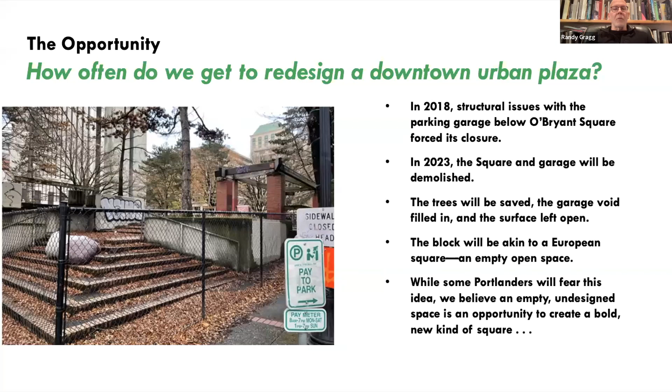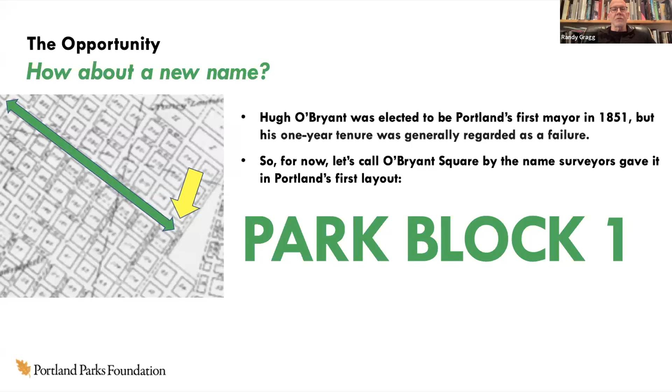So first off, I think we can think about this square as something different from the get-go. Hugh O'Bryant, I'm sure he tried hard. He was our first mayor. He had a one-year term that ushered in the first charter reform movement. He did give some books that formed the early collection of the Multnomah County Library, so that's important. But for the most part, he was not an incredibly important person in Portland's history. In the earliest maps, the block was called Park Block 1. It was part of a series of parks. So we'll start calling it that in an effort to clear the slate.

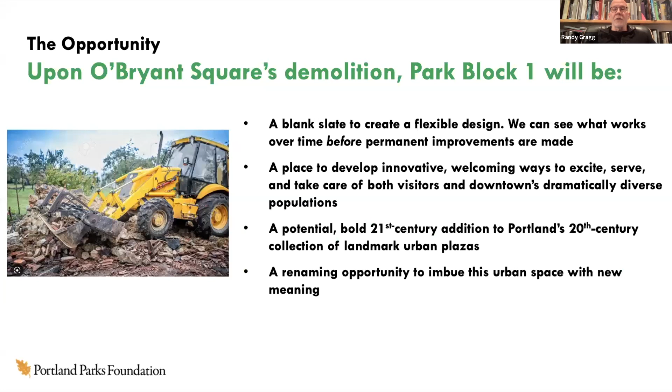So what we have here is an opportunity, a blank slate to create a flexible design that we can try out before permanent improvements are made. It's a place to develop innovative and welcoming ways to take care of both visitors and downtown's existing populations. We think it's an opportunity to really think boldly, and as I mentioned, a renaming opportunity.

So back to these fundamental questions: who's the you? We're going to be reaching out to all kinds of groups: social services, residents, urban advocates, arts groups, adjacent property owners, businesses, food vendors and retailers, and also an important constituency: downtown youth.

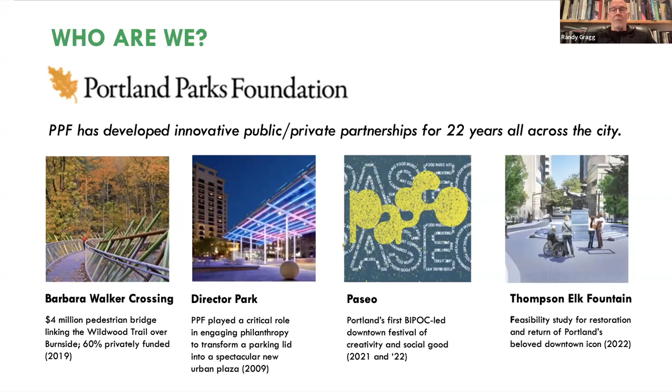Who are we? The Portland Parks Foundation, for those not familiar with us, we've been around for about 22 years. We've done projects all over the city. Our motto is we help people help parks. We really try to wed private sector initiative and money to public improvements of parks. Our biggest project was the Barbara Walker Crossing, which links the Wildwood Trail over Burnside, over what was a really dangerous crossing. We finished that about 3 years ago. We were involved in Director Park. We have an annual festival called Paseo, where we bring communities of color together to organize their own festival downtown. And we're currently working on the restoration and hopefully return of the Thompson Elk statue. That's just a few of our activities.

The Loeb Fellowship is a fellowship program that I was very lucky to be part of. It's a 50-year-old program. About 400 Loeb Fellows at one time or another have gone through Harvard, mid-career professionals looking to backfill and expand their horizons. We're bringing a great group of folks with different expertise in areas around public space, ranging from real estate to trauma-informed design, to mobile architecture, to youth, and to public outreach methodologies.

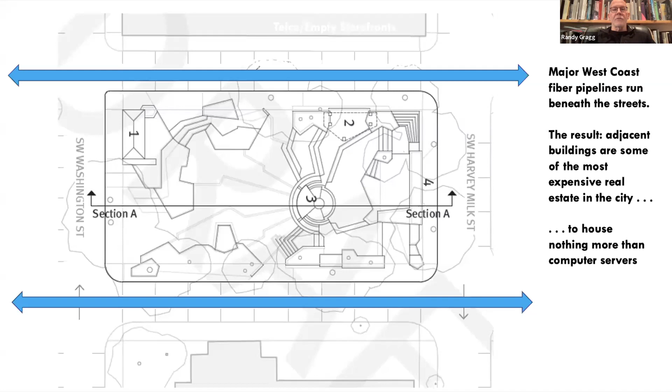These two blue lines mark basically the I-5 of fiber brackets around O'Bryant Square, and that's led to some interesting things. We have both some blank wall buildings around it, which don't really front it with good uses like retail, but we also have entire buildings devoted to telco equipment. The Pittock block, on top of this slide, is actually a critical infrastructure facility — the entire state's 911 system is run through the servers in there. So while this is all very important to how we operate day to day, it doesn't make for very good neighbors for a park.

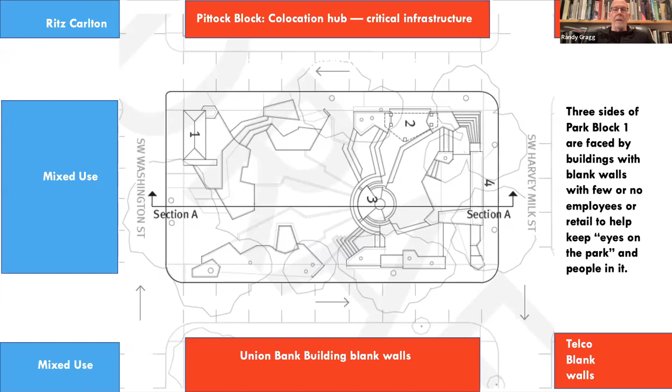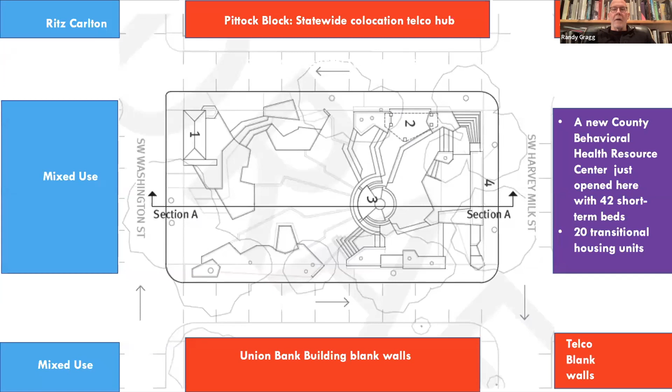It doesn't bring the office workers and retail uses that really make for a lively urban plaza. And then Multnomah County remodeled an old building to the north into a trauma-informed mental health and behavioral health facility, and that's created another interesting neighbor for the plaza.

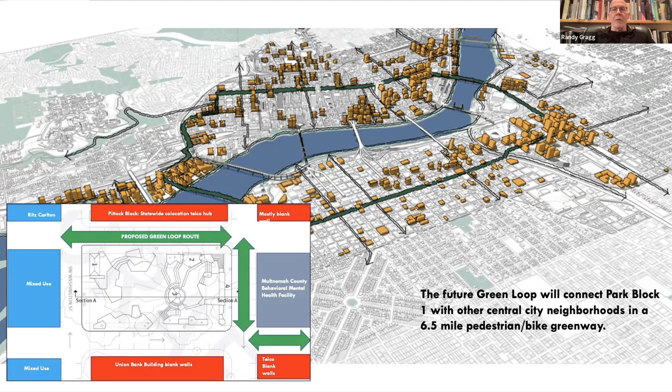The Green Loop will go around O'Bryant Square, which is going to be a really important and interesting new piece of infrastructure that will bring a lot of people to it. So that's a good use.

So real quickly, I wanted to show you some of the thinking about this area of town, because since I've been here in the 90s, we've seen a lot of ideas for this. This is one by our former mayor, Neil Goldschmidt, and Tom Moyer, a prominent property owner who began buying up all the buildings in between the two parks and wanted to mow them all down for a grand plaza there.

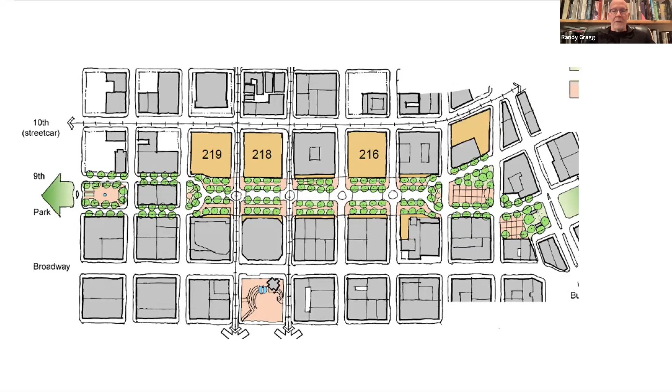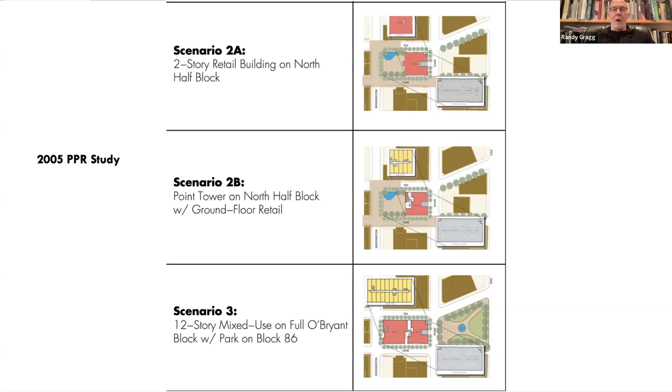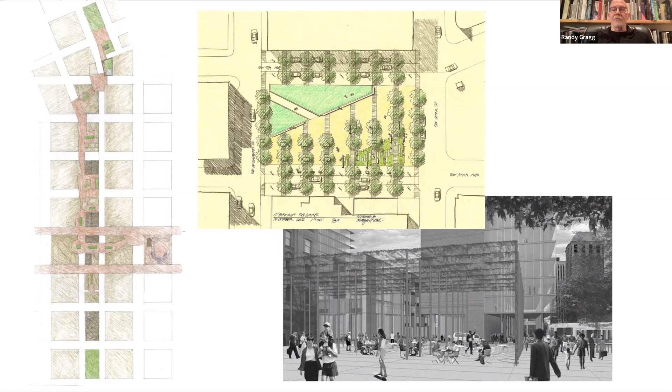PPR did a study back in 2005 that even looked at partial development of the block to put more eyes on the block. To the left, you'll see a proposal by Hulse that was just a study of the interstitial spaces. On top is a proposal by Mayer/Reed done in consort with the Director of Park Development. And on the bottom is a scheme for a grand trellis that Allied Works did.

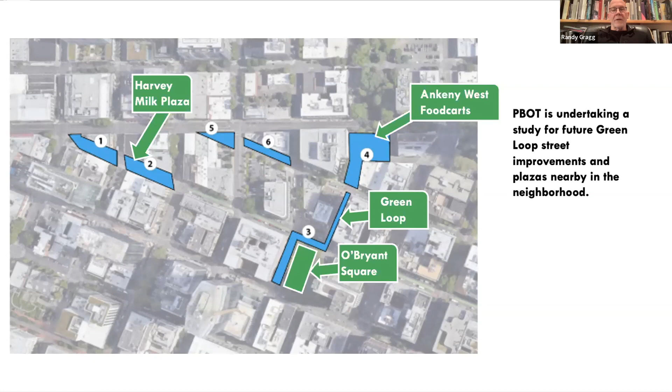What's actually happening now is PBOT's going to be doing a study of several spaces around the square, and Nick Falbo will talk more about that. And then, whoops, this slide shouldn't be in there. What is also happening on the ground is this.

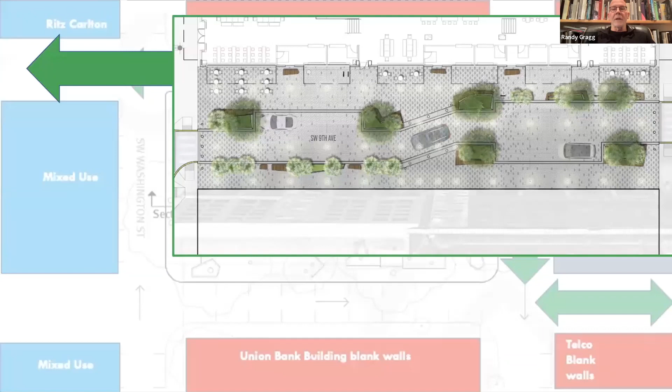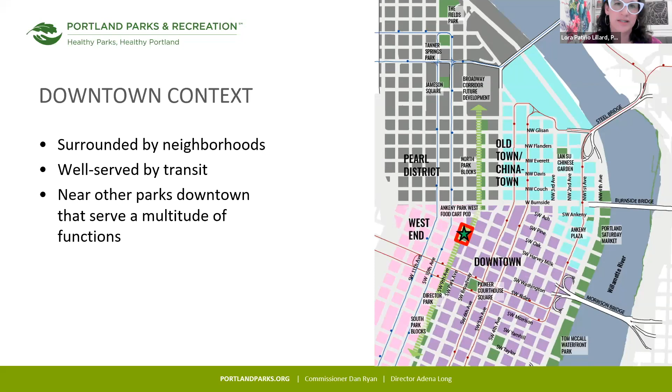The square is nestled along the North Park blocks and the South Park blocks, which are some of the city's earliest platted contiguous walking parks and plazas. This particular square is one of the non-continuous park blocks between Director Park, which includes the water feature, a large pavilion, and a leasable kiosk building to the south of Park Block 1, and Ankeny Park West, which is currently home to outdoor seating for a small food cart pod that surrounds it.

The park blocks do feature some small recreational facilities. The North Park blocks has a new playground, basketball courts, and bocce courts, and the South Park blocks features a playground at the very southern end. Each of these parks is 100 feet by 200 feet, so everything that gets programmed in there is sitting within a very tight space.

The northernmost section of the North Park blocks, shown in that dashed line, is being designed with the Broadway corridor, which Nolan Lienhart is here to talk about. Portland Parks and Recreation has started the design process for the 2 new parks there, and the first one should start construction in 3 to 5 years.

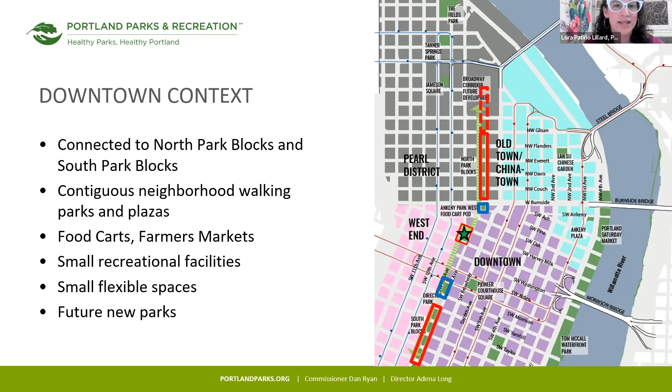The South Park blocks is home to 2 farmers markets, and it recently finished a master plan process. It's envisioned to add more seating, small flexible event space closer to the Portland State University campus, and a rotating art exhibit space near the museum and theaters, among other features.

This park system will be more formally connected by the pedestrian and bicycle path known as the Green Loop, which connects the park blocks and other open spaces through the entire central city across the river. O'Bryant Square is that really important pivot point for the Green Loop alignment. Nick will share how the street plazas at Harvey Milk and 9th are envisioned to activate in the near term.

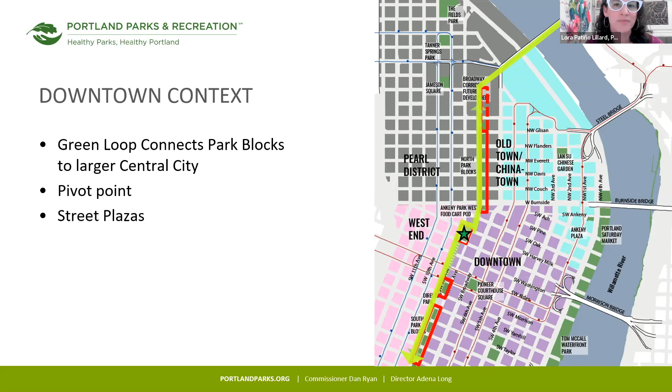This slide is really just meant to prime the pump for discussions that will happen over the next few weeks about near-term activation. We see this as an opportunity to test and determine what makes sense before the fully funded future state. As Ross mentioned, the first several months of COVID and the years that followed have been an opportunity for people to experiment with and create open spaces or the sense of public spaces where they didn't exist, and to use it differently, or to reacquaint themselves with the park system.

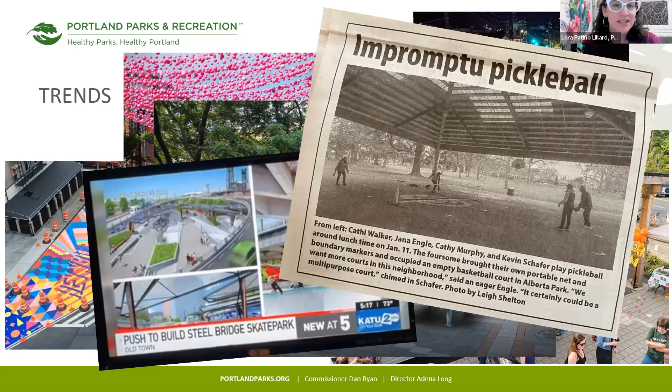And they did. Public use of our park system has skyrocketed. People have also begun to notice what's missing from the neighborhood parks and open spaces. The public has been very assertive about what they've noticed in this moment in terms of advocacy for skate parks and pickleball, off-road cycling, futsal courts, food, seating, and flexible spaces.

And we're really excited to listen and be engaged with local leaders and national experts in this discussion. So I will leave it at that for now.

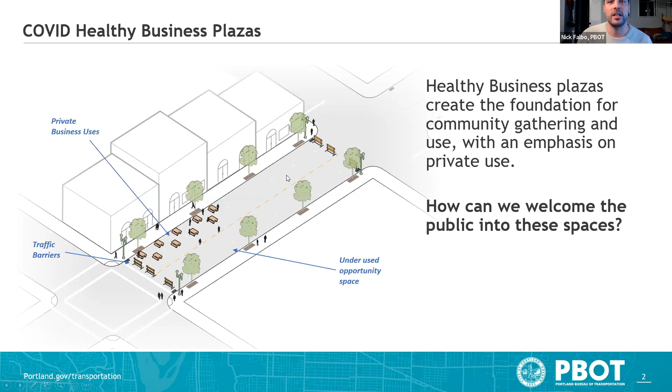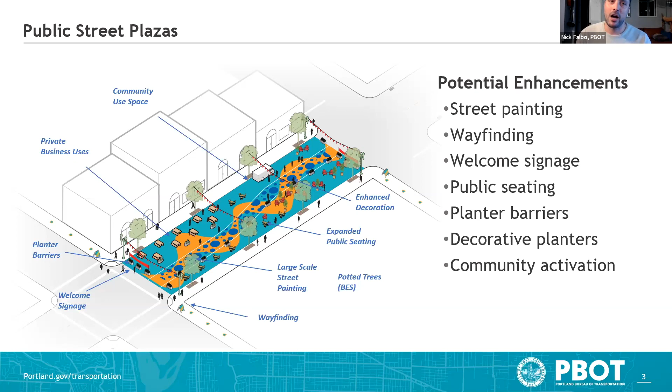In 2021 and 2022, we started experimenting with creating public street plazas. We worked with businesses and community groups, proposing enhancements with decorations, plantings, paintings, public seating, and community activation. Depending on how you count, we've got roughly 15 sites around the city that we're working with businesses and partners on. A few of them you can see here.

Dream Street in Northeast Portland, working with the Soul District Business Association, is a great example of a neighborhood-scale street plaza site. In the central city, we have a few: Northwest 13th Avenue, a street long imagined as a pedestrianized corridor, gives us the chance to experiment with how that might work. Only a few blocks from O'Bryant Square is the Cart Blocks, a public-private partnership meant to support small businesses operating in a street plaza in the right-of-way.

These sites are inherently temporary, but we're excited to explore how we can formalize at least some of them and have them stick around as permanent expansions of public space. Just at the end of last year, PBOT was awarded a grant from the Economic Development Administration to expand and enhance these temporary street plaza locations.

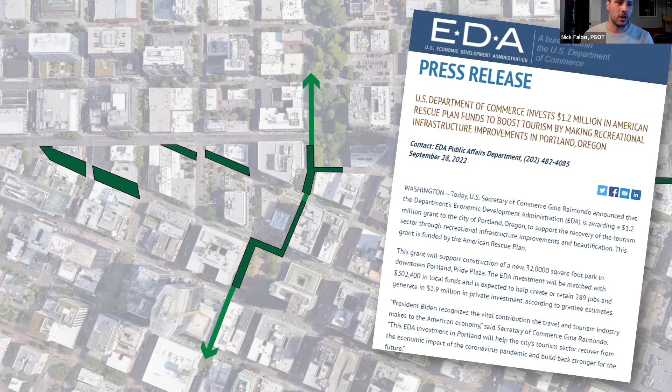We're looking at sites in the West End near Harvey Milk, as well as sites along the Green Loop, an alignment that runs along the North and South Park blocks adjacent to O'Bryant Square. We'll be developing street plaza design standards for our growing network, but we really hope that in situations like this, where we're in close proximity to other spaces, these spaces can be designed in concert to reflect and build on each other.

You've heard a little about the Green Loop in today's presentations. It's a future planning concept of a 6-mile linear park and path that invites Central City residents to experience Portland Central City in an entirely new way. What you see here is the vision that the Green Loop can not only connect public spaces, but embrace them as an integral part of what makes that space succeed.

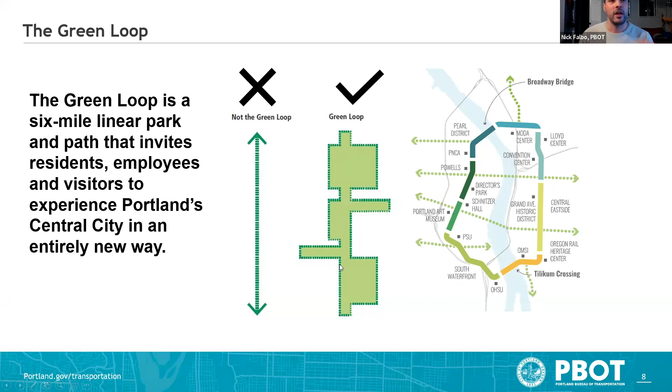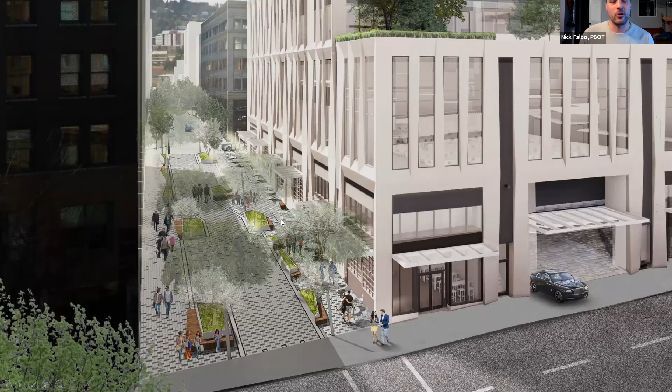This isn't the first set of street plazas along the Green Loop. Randy showed this image earlier - this is the park at 9th Avenue at the Ritz-Carlton, where they're designing a wonderful street plaza experience just to the south of O'Bryant Square. I think it gives you a hint of what this might look like further along the corridor.

As we're getting into the future of O'Bryant Square, I want to make sure that our inspiration for what happens in the square doesn't just end at the curb, but instead embraces the wider street context as an intentional and complementary part of placemaking. What you see here is the full Green Loop alignment wrapping around O'Bryant Square, connecting from the Cart Blocks to the north and the Ritz-Carlton to the south. So future conversations can consider how these boundaries exist or don't as public space, programming, and activation is being created.

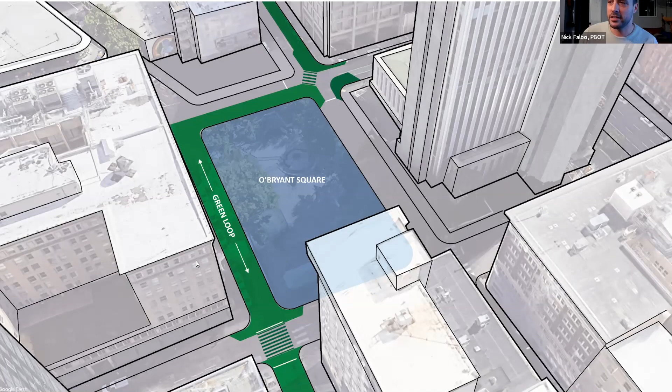So great to be able to look at this entire context of streetscapes and squares. And with that, I'd like to introduce Todd Ferry with Center for Public Interest Design, who will be an essential partner to this. He can talk a little about how they operate and some of the projects they've done in the past. So take it away, Todd.

Thanks so much, Nick. I'm so happy to be here with you all, exploring this exciting project. I'm Todd Ferry with the Center for Public Interest Design at Portland State University, and I'll share a bit about our center and participatory processes in terms of how we're thinking about these upcoming events around O'Bryant Square. Our center is involved in a lot of things - we work with students as fellows, program and classes, we work with faculty, we have staff, fellows of practice, all sorts of things. So when I say we, I'm talking about a bunch of amazing people who are involved here.

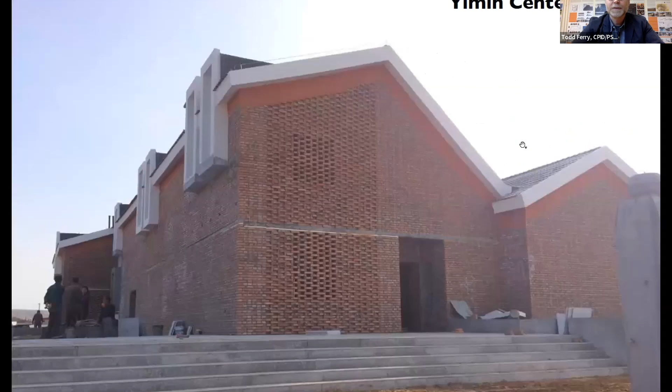But at the heart of what we do is design based on participatory processes, so it's really community-based and informed in that way. Even if we're designing a building like this, which is a project we did in Inner Mongolia, China, we're giving equal attention to the tools that allow us to facilitate a conversation - in this case, a chalkboard model, so we could have better conversations with our collaborators.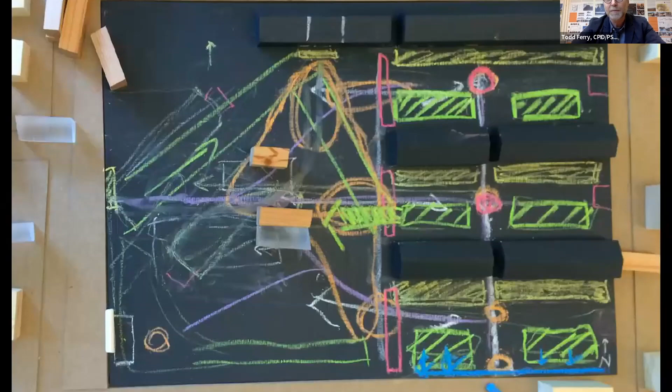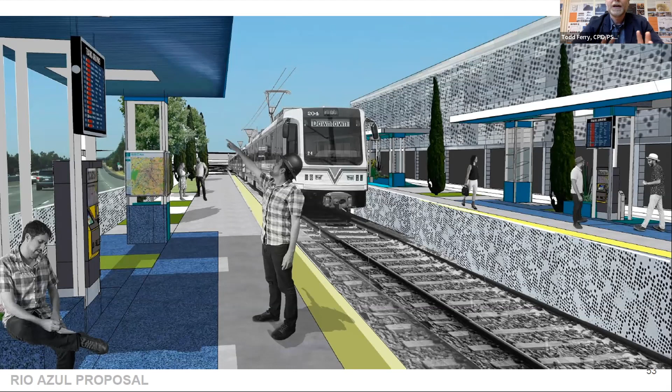As we approach the O'Bryant Square project, we're going to be thinking about public space and what it means to truly involve as many voices as possible. With a light rail station under construction right now in Sacramento with Sacramento Regional Transit, it's not just a matter of designing the station, it's designing the conversation and the tools and different ways that we can bring out all of the things we need to understand, and that the ultimate designers need to understand to make this work. And then documenting that conversation—that'll be a big role we play, documenting the conversation and making all of this public.

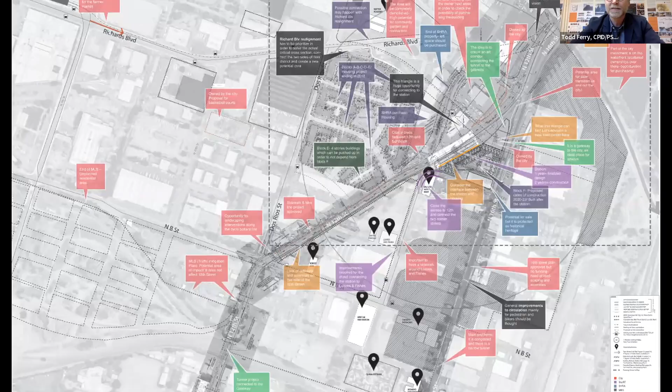We think a lot about placemaking and activation, even temporary activation, which will be a big part of the park. While the park is waiting for long-term design, there are going to be temporary activations to inform it. Our collaboration with the Portland Opera—you might have come across Opera a la carte, free performances they do in the summertime—but even with this, there was a temporary pop-up set of performances that informed the design. So rather than just designing it, we're trying singers on top of it, inside of it, and in front of it. We're hearing from the opera singers and from the people experiencing opera in a new way, and that all ultimately goes into the design.

In terms of public space and temporary activation, as Nick was saying, we're seeing that happen in the street plazas around Portland more than anywhere else, probably at the moment. There are all sorts of interesting ways that people have come in and participated in that, and Portland's amazing architecture and design community have contributed in a lot of fantastic ways. Our center was able to work on the Arleta Triangle Square Plaza last year, led by a fellow of practice, Scott Mooney, an architect at Bora, who we work with quite a bit.

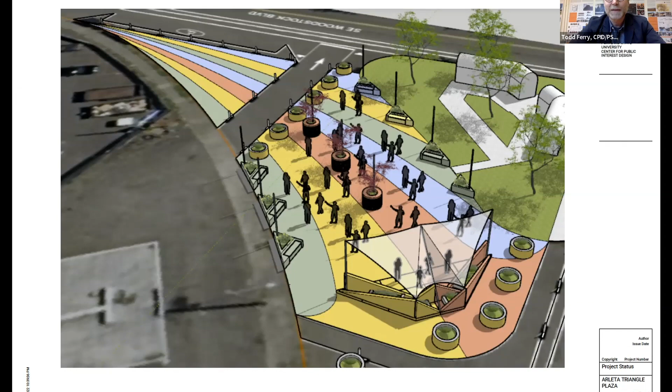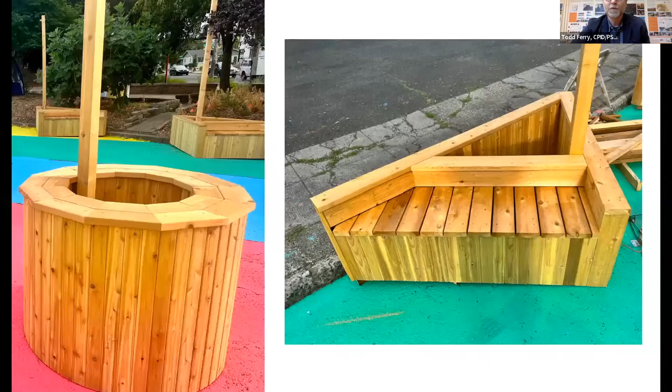This was for a permanent plaza in the Mount Scott neighborhood, informed through conversation with all sorts of stakeholders in the area, through feedback from surveys, and then painted with the community to become an active space. When we think about participatory processes, it's not just taking in information in this case—it's painting with the community, it's activating with, but then also looking for opportunities.

Such as the benches and planters that occupy the square—these were actually through a partnership with Anderson Construction and local schools. They were built by local middle schoolers throughout Portland as part of a STEM program, and then peppered on site. So it really expands—the participation is not just simply about the outcome, but the process itself becomes really important and empowering.

An example of involving the architecture and landscape architecture community in the process, which we plan to do for O'Bryant Square, is the Kenton Women's Village. A few years ago, after the city declared a state of emergency on homelessness, we and a lot of great partners invited the architecture community to sit down with people experiencing homelessness, interested in creating villages with lived experience, and came up with designs. Fourteen teams formed from that, and what you're seeing here are three different sets of designs from different teams.

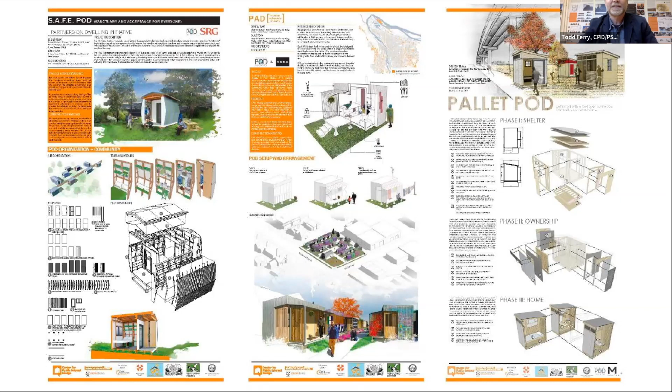Those teams went on to actually build these pods themselves. In just a couple months, they were then displayed downtown. The actual conversation at the initial design workshop was participation, the display of these was participation, and then the feedback on the pods themselves from people who would ultimately live in them was all part of this.

A couple years later, when Kenton Women's Village was getting a more permanent home, the construction community stepped up, and 21 construction teams built and donated pods to that project. While this could have been done a lot of different ways, through all of these different stakeholders, the results are better, more informed, and it continues to build on itself.

One way that we think about a lot of this work is through asset-based processes, and that happens a lot in terms of working on affordable housing. It begins with a recognition that if new investment is coming and there are already amazing people around, that's an asset and a strength we can leverage, as opposed to beginning with a deficit-based model—which I think Portland sometimes gets in the habit of, thinking defensively and solving a problem rather than being aspirational.

A project we might work on around asset-based community development like this was an affordable housing unit developed by Community Development Partners, designed by Ben Waechter Architects.

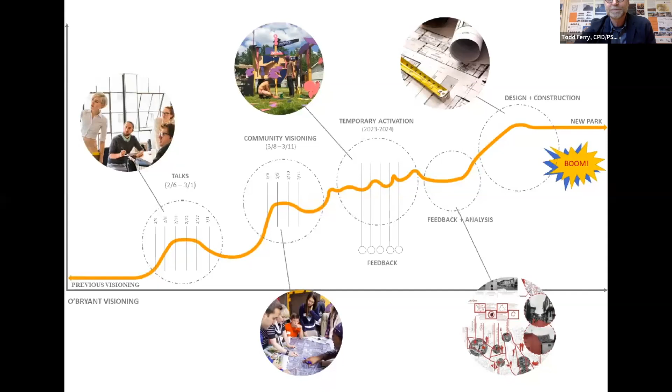So what we're working toward is talks that are coming up, this community visioning process that Randy spoke about at the beginning, happening March 8th through 11th, that we hope you'll participate in. But the activations are part of a process. The feedback for temporary activations will continue to inform proposals. So this isn't a one-time chance for feedback. I think it's an ongoing process that we want to invite as many people to partake in as possible. And so I think that's where we are, and I will stop there.

Okay, thanks, Todd. I sort of messed up because of a misplaced webinar chat box, and I skipped over Nolan. So Todd and I were sort of going to bracket this, and I overlooked Nolan, who was going to offer a wider view of connecting all of this to the Broadway corridor and to the aspirations on the horizon for the park system going north. He's also been around Portland for a long time and has worked in urban design at ZGF for a long time, so we were really interested to get his observations of our public space system downtown. So with that, I'll turn it over to Nolan, and just imagine that he's actually before Todd, so in your minds. Well, thanks, I thought I was last on the list of folks, so this worked out perfectly.

Want to talk briefly about the Central City Master Plan for the U.S. Postal Service site, which is a 14-acre parcel at the core of a broader planning area known as the Broadway Corridor. My colleagues at ZGF and I prepared a framework plan for the site in 2015, and then worked with Place Landscape Architects, who led open space planning for our Central City Master Plan, completed in 2020. We were fortunate to have great partners in Prosper Portland, Portland Parks and Recreation, the Portland Housing Bureau, and the Portland Bureau of Transportation in developing the master plan concepts I'm sharing today.

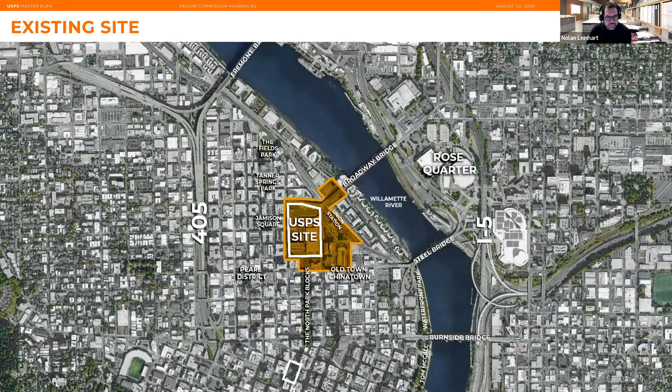Zooming in on the immediate project area, you can see there are a number of reasons why this site is prominent within the central city and why the city has invested in it as a center of residential and employment growth. In addition to sitting right at this gateway to the central city, it also sits between and really separates the heart of the Pearl District from Old Town Chinatown.

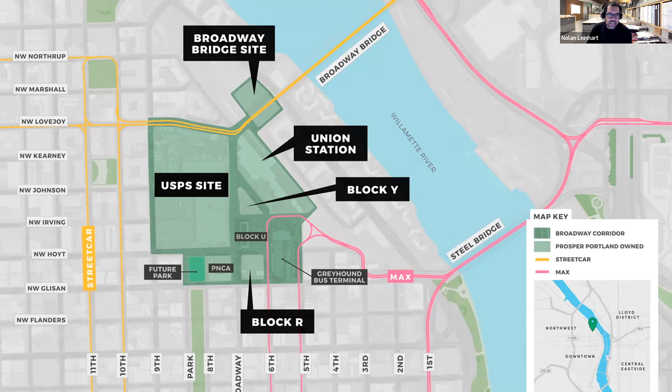On the upside, it benefits from decades of infrastructure investment in the surrounding blocks. It has streetcar, light rail, Amtrak, and several enhanced bicycle corridors all around it. Almost everything in the darker green area shown here of the Broadway Corridor planning area is owned by Prosper Portland.

And so it really is a place where public investment, public planning, and public-private partnerships can be catalysts. The site has a major role in Portland's long-range planning and was projected to accommodate about 10% of the central city's residential and employment growth over a 20-year period.

When the plan was passed in 2020, the expectation was for about 4,000 to 8,000 jobs and 1,800 to 2,400 new households. With the national and local office utilization trends, that's probably more likely to be weighted toward residential uses going forward.

So I could spend all my time describing what's involved in a central city master plan, but for today, I'll just note that it does require identifying the location, scale, and purpose of public realm elements like streets and open spaces, with the recognition that specific design of these spaces will unfold over the years that follow.

The public realm concept for Broadway Corridor really focuses on placemaking around two major axes through the site. One is what we call the Johnson Main Street, which extends a neighborhood greenway that is already established along Johnson from the west foot of the West Hills all the way down to the Willamette River.

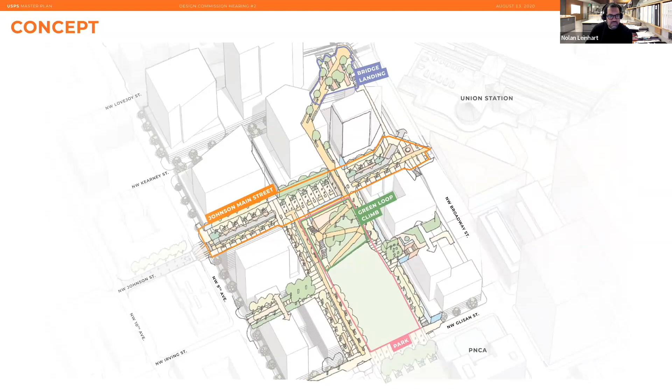That connection is currently blocked by the site, but would be unlocked by the demolition of the post office building. That Johnson Main Street deviates from the typical 60-foot right-of-way in Northwest Portland and establishes a wider width to accommodate additional public gathering spaces and protected bike infrastructure, and really has a great opportunity to connect the Pearl to Union Station, to the transit elements there, and to Old Town Chinatown.

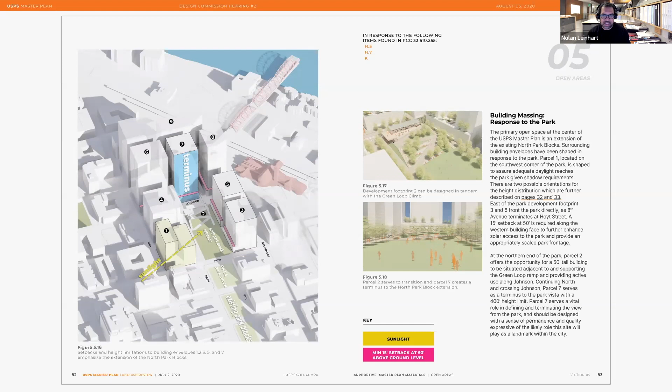The other major element here is a triplet of new park blocks that will provide a terminus where the park blocks meet Johnson Street, creating a bit of a T there. So ZGF and PLACE thought a lot about how to celebrate that terminus, how to think of it as both a node in the park blocks as well as a gateway for those entering the central city from the northeast.

The introduction of the Green Loop really amplified the importance and the challenge in terms of how these two axes interact, because it introduced a 30-foot vertical transition to the horizontal intersection. So the Broadway Corridor is one of several moments around the Green Loop where it makes a transition or a gateway between parts of the city, often over railways, freeways, the Willamette River, and in many cases that involves a vertical transition.

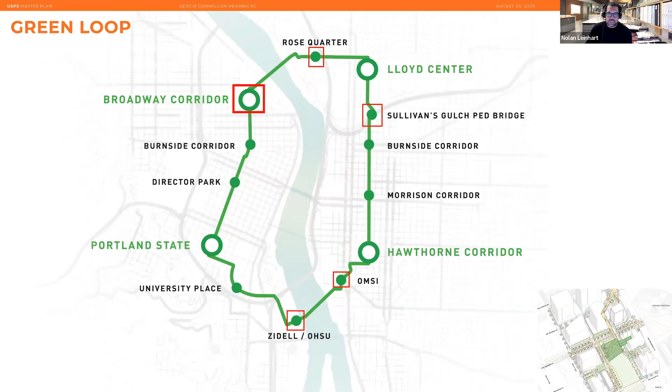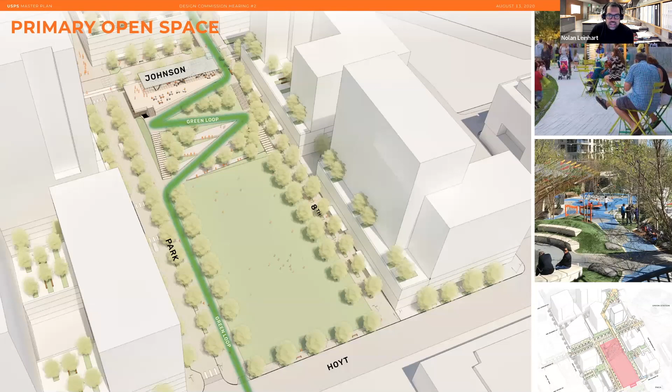So the master plan concept that ZGF and PLACE developed with our partners at Prosper Portland and Parks involved using that transition to create elevated park space, climbing up a landscaped hill, providing moments to stop and look back at the park blocks, the city, and really provide an orienting moment in the district and in the central city. At the top of the climb would be a landing space that could be used for a variety of types of gathering, and then a bridge over Johnson connecting north to the Broadway Bridge.

So this is a view looking north from Hoyt Street toward the Green Loop climb. And you can see that rather than simply having a building forming the north end of the park blocks, the park blocks themselves start to rise and climb, creating this visual green terminus to the axis.

So when we first proposed this, there was some question of, is this just going to be a bike ramp? And so I think it was really important that we convey and communicate that it was going to be truly a park, a rising park, a hill of sorts, and make that consistent with the goal of the Green Loop, which was not simply a bicycle pathway or a pedestrian pathway, but really that notion of linear open spaces with landscape, with public art, with places to gather and sit.

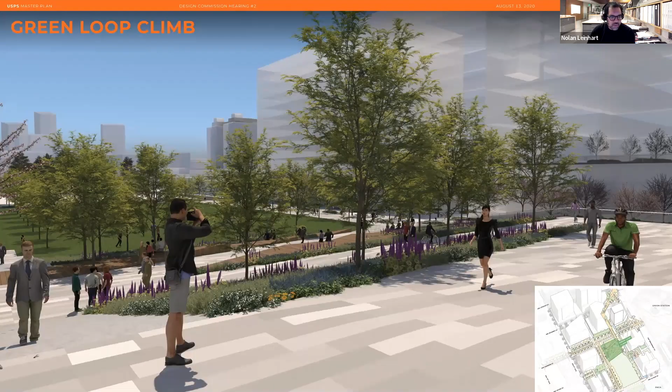And then of course, views back toward the city and the park blocks. This is a view looking north over Johnson Street, where a bridge would cross and allow you to head north toward the Broadway Bridge.

So I'll just stop there, and happy to talk a little bit more during the Q&A.

Great, thanks Nolan. Now if you could—oh, there we go. We still have your screen share up. Okay. I don't know if I have the power to boot you. Maybe Sabrina does. There we go.